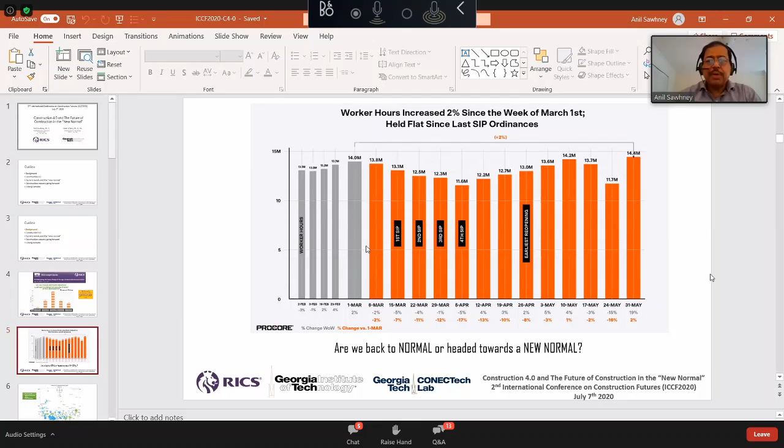Okay, I guess what I will do in the meantime is use my machine to run the presentation. The title of our presentation is Construction 4.0, and the Future of Construction in the New Normal. Thank you for inviting us to present on this topic. We're going to follow a simple structure: I'll provide some background context, an overview of Construction 4.0, which is the title of a handbook I've co-authored with Javier and Professor Mike Riley from Liverpool John Moores University, then hand it over to Javier to present his work relating to Construction 4.0, and at the end, hopefully some questions and answers. I understand this is the last presentation, so we must remain on schedule.

The first thing I want to share is some of the work RICS has been doing since we entered this COVID situation. We've been running a lot of digital webinars for our members and non-members globally. I'll pick one we recently worked on, on May 26th, called Prefabricating the Future: Design in the Age of Industrialized Construction. This webinar discussed, with the help of leading industry experts, how construction is going to shape up post-COVID.

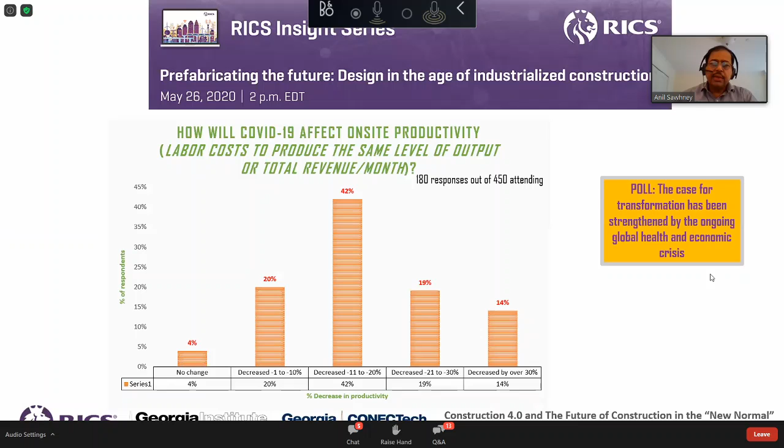Construction sites are seeing about a 10 to 20% drop in productivity due to health and safety guidelines and other safe distance measures in place. Generally, people felt during these sessions, attended mostly by industry folks, that the case for transforming towards a digital approach to construction is becoming stronger.

This is further evidence of what's happening - a very interesting application of digital technologies in construction. Most of you would have heard of a platform quite popular in North America called Procore, that most construction companies have begun using. Based on this tool, they've done big data analytics in the background, since their system is used by project delivery networks on a variety of projects throughout North America.

This graph was plotted using data stored on their cloud-based system, and you'll notice a significant drop in recorded worker hours in the month of April. The drop started really in March, with some ups and downs, and a significant decline. But by May and June, the levels of worker hours recorded are reaching back up, or even going beyond pre-COVID times.

So does that mean we are back to normal, or are we headed towards a new normal?

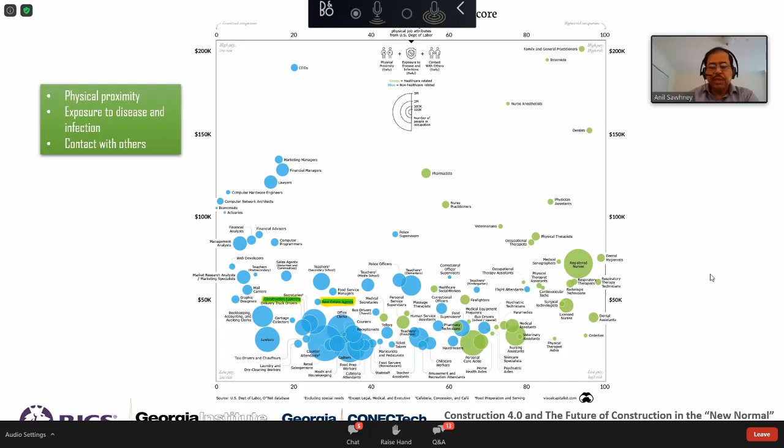If you are keeping track of what's happening in the industry, you will notice various parts of the world are using this as an opportunity, calling it a reboot, a restart, reimagine, reinvent. RICS, this month, is calling it Build Back Better, or the new normal. I don't know what the real story is, but one thing has become clear: there is going to be an acceleration towards digital transformation given what we are witnessing.

That transformation, as we see it at RICS, is towards three major themes: how we construct or fabricate, how we develop and use digital tools, and how we procure and deliver. Using that as a theme, we needed a paradigm or a glue that combined these three needed transformations, and we feel that the Construction 4.0 framework provides that.

We define Construction 4.0 as a paradigm that uses cyber-physical systems, Internet of Things, data and services to link the digital layer - consisting of BIM and CDE - and the physical layer - consisting of the asset over its whole life - to create an interconnected environment, integrating organizations, processes, and information to efficiently design, construct, and operate assets. So that's a paragraph of a definition.

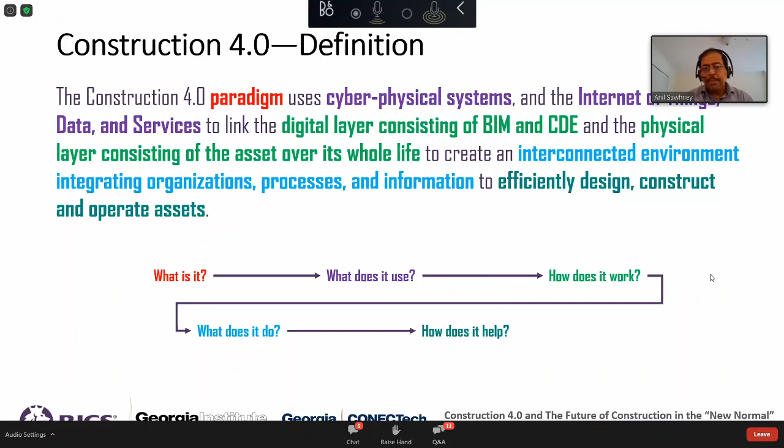But broadly, what we try to define is what Construction 4.0 is, what technologies and emerging trends it uses, how it works, what it does, and how it helps. Broadly, we think the Construction 4.0 framework rests on a model and data-centric layer, supported by product platforms or physical platforms and digital platforms, which eventually impact or benefit the people and processes we envision in the Construction 4.0 framework.

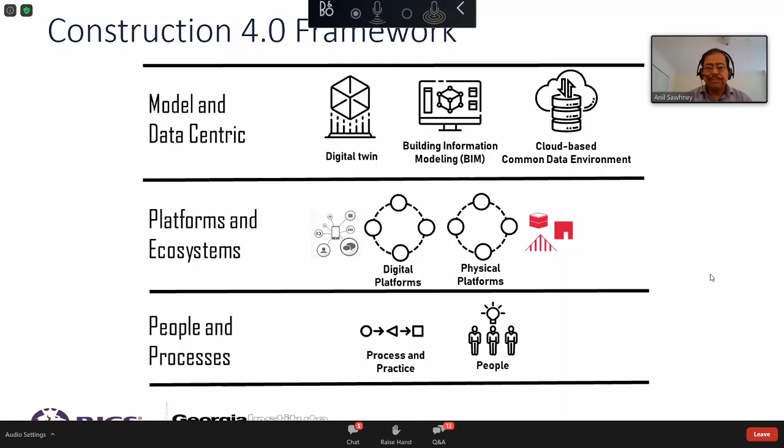One of the aspects we cover within Construction 4.0 is this idea of digital ecosystems. As you know, many of the companies that have been successful have moved away from selling a product. They create an ecosystem in which a large number of collaborators come and create innovative products where the end user or customer also participates. I think that is happening in our industry today, and that is a crucial feature of Construction 4.0.

Large players like Autodesk have Autodesk Forge. Procore has its own platform where you can take their core layer, which is exposed using SDKs and APIs, and build digital tools to solve real world problems, partnering with third party developers. You can find more information about the digital ecosystem in what we have published.

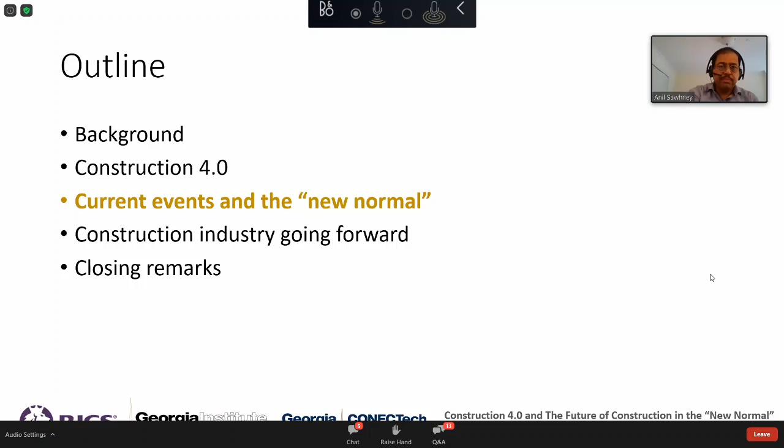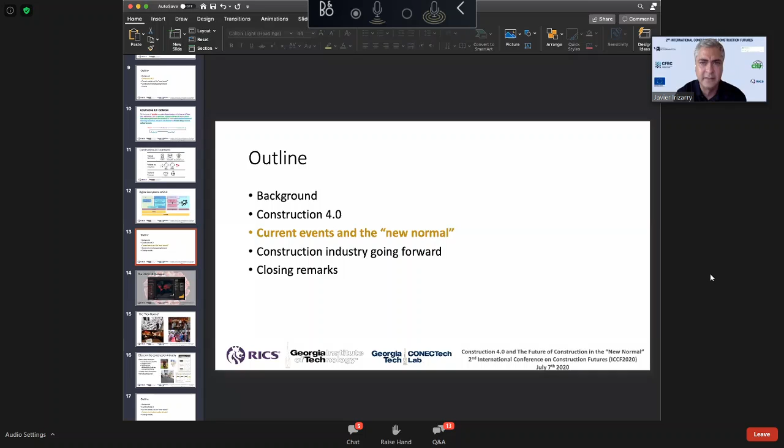Excellent, thank you Anil. Apologies earlier, my computer didn't seem to want to share my screen. I'm going to try to do that now. Should I stop my presentation? Not yet. Okay, can you see my screen? If you can stop sharing. Is my screen visible? Yes. Okay, so I will continue.

Some of the presenters earlier during the conference—first let me thank the organizers and colleagues for their wonderful presentations, very informative, and for the opportunity to come and share some of the insights that we're gleaning from this whole situation. I won't spend too much time going into the pandemic itself, a very controversial subject, as you can imagine, but it has had a significant impact worldwide.

You can imagine the situation in retail establishments. For example, here in the U.S., an attempt was made to start reopening. Some places were determined to be reopening sooner than they should have, and they're having issues now. But adaptations were made to the way that businesses operate, services are rendered—social distancing is the norm now.

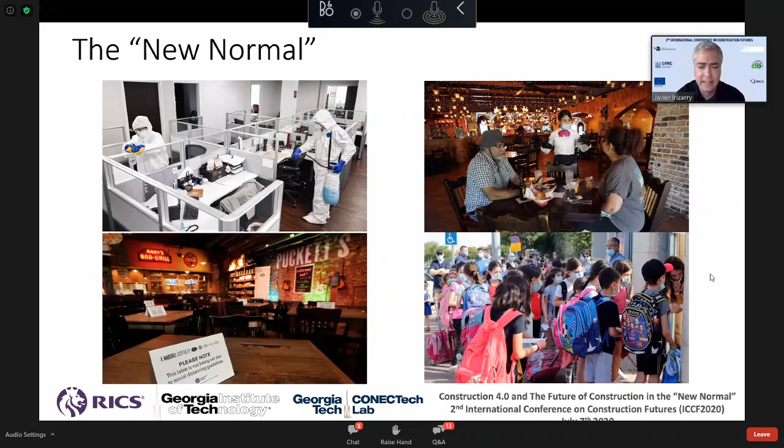But how has that affected the construction industry? Some colleagues have gone into detail on the economic impact and how the industry is being affected. In broad terms, what we see is the need for social distancing—workers have to work with more space between them, enhanced personal protective equipment such as face coverings and face shields, and arrangements of work in staggered shifts. Now the trades have issues that would affect schedule, as they have to work on different schedules almost. And the need for top-to-bottom disinfection of job sites and things they use every day, such as tools and machinery, have to go through enhanced disinfection protocols.

Supply chain disruptions—covered in detail a little earlier—and the use of remote office work. Now a lot of the functions that can be done in job site offices are now being done remotely as well. I show some examples of a local construction company here in the city of Atlanta, Batson-Cook Construction, and some of the measures they've taken.

This is taken from their protocols on how to implement and educate their workforce on what social distancing is. For example, some of these graphics show the relationship between common day objects, or objects that workers would find on a construction site or in everyday life, and what that means in terms of separating themselves from others. Also, the protocols on temperature measurements—that is being implemented at job sites, and now there are temperature measurement stations that workers have to go through every time they enter the job site.

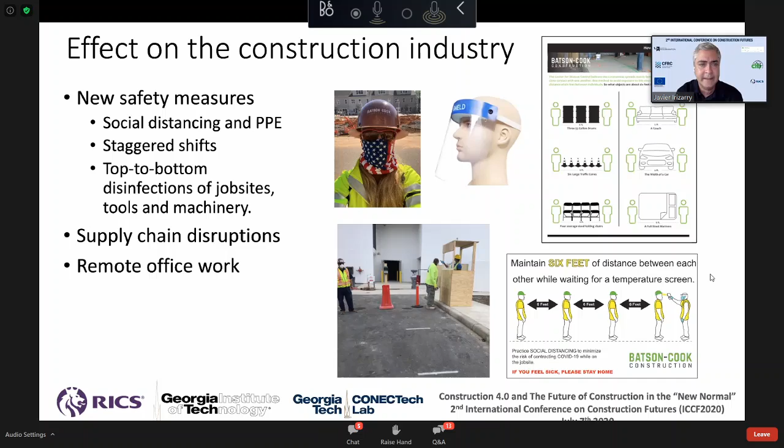So what are going to be the effects of these? These are things we're asking ourselves, and there will be a lot of research that will try to assess what the quantifiable impact of this situation will be. So what do we think the industry is going to be experiencing going forward? I have a couple of things I'd like to talk about.

What we're seeing, and thinking is in the process of happening, is this integration of technologies and the Construction 4.0 framework that will become even more relevant going forward. Like Anil mentioned earlier, we worked on this Construction 4.0 book. We didn't know this was going to happen, and we thought the time frame for implementation was longer than we think. A lot of the technologies are already here.

But we did not imagine we would be thrust into immediate application of some of these tools as we are seeing now. You see examples of workers who have to wear enhanced protection equipment, physical separation, but also the implementation of technologies that have been researched and tried to apply for years, and sometimes decades, like virtual reality, augmented reality, robotics, and so on.

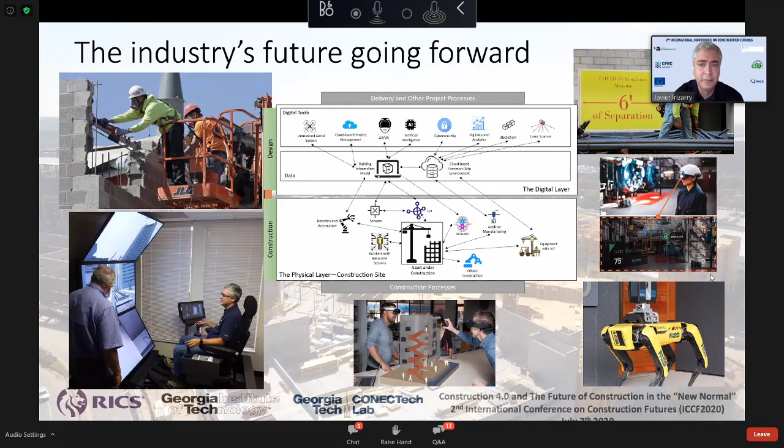So some of the things I'll quickly go over: the need for new or adaptive skills. Professor Soyman mentioned that education is going to have to change. Our students in the future will have to be more nimble and adaptable to these new technologies coming into the workforce. We're seeing that and implementing it right now, trying to address it through our own educational offerings. Collaborative environment.

We had the experience in higher education here, and across the world I'm sure, of having to switch at the drop of a dime to virtual learning. That same experience in virtual learning will be even more important. We continue to have a need for remote work, and the redesign of tasks that we perform now in the industry.

I have one quick research example that I'll share, but there are many more that show how Construction 4.0 technologies will help redesign some of those tasks. I'll talk about what's happening in construction education that will hopefully help us address the current situation, and looking toward the future, implementing Construction 4.0 for the improvement of the construction industry.

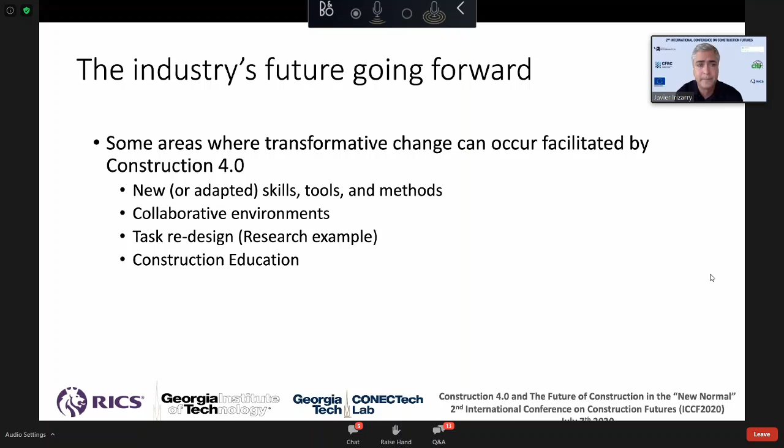So, new or adaptive skills people will have to start getting used to and learning about. Some examples include, from my own experience in the last almost 10 years researching the use of unmanned aerial systems for applications, the figure on the left shows a concept we imagined for how drones would be used in construction sites. This is almost 10 years ago. Now this is a reality.

The part that's still not fully implemented is something like two-way interaction or communication between workers and drones on job sites. With the need for social distancing, we think this will be a reality sooner than we expected.

We've also been working with the development of unmanned aerial platforms that can help move things around a job site. Logistics is something COVID-19 has affected because of the need for social distancing and issues with logistic and supply chains. So we've developed a few units able to carry small and large loads, about 100 pounds. In the future, we see how these vehicles will help site workers move things around without having to interact with each other that much, at least for the foreseeable future.

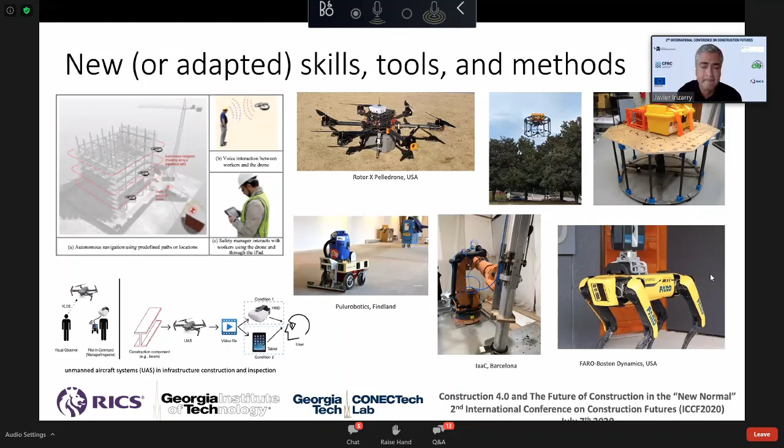There are other technologies that are part of the Construction 4.0 framework, such as prefabrication. A few years ago, I had the opportunity to visit China and tour some of their concrete prefabrication facilities, where they developed very efficient ways to prefabricate concrete panels for high-rise construction applications.

We don't have to go too far to see successful examples of this. Last week, the Prime Minister of the United Kingdom, something mentioned in an earlier presentation, toured a facility from Totally Modular, a company creating prefabricated dwelling units in the UK. This is something that will become more used going forward.

In terms of design, there are companies that have developed design software. Vertex Systems is a worldwide company with design software that companies can use to design prefabricated modules and construct factory environments. This will definitely be helpful and useful given the current situation and the new normal.

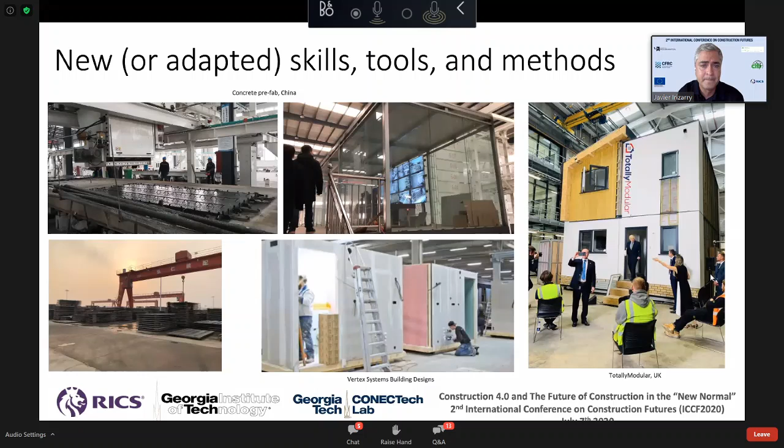So about collaborative environments, Professor Silberman was talking about some of the virtual reality setups that they have used, and we think this will continue to grow.

But in addition to collaborative environments that use virtual reality, something we experienced moving to online education, and feedback we received from students, were the issues with the lack of personal interaction. So these virtual environments are evolving and will evolve to try to provide some sense of telepresence.

To that point, there are companies, Kompai Robotics is one example, that have developed telepresence robots used in healthcare environments. We think this will be something we'll start seeing in construction sites, so you can still have a physical presence on the job site with physical or social distancing, but not be so socially apart.

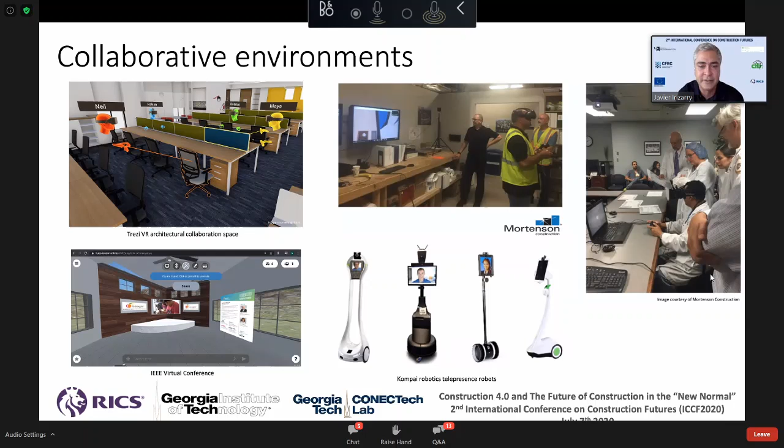In terms of redesigning tasks, we are starting some work with the Georgia Department of Transportation. We didn't expect that this type of research would become so relevant to the current situation when we started talking about redesigning tasks.

The purpose was to allow inspections of mowing work, a very mundane task in construction or infrastructure maintenance, where supervisors go out to the field to inspect contractor work. We're looking at providing a remote version of that task, where the inspector can deploy drones to take images, and using artificial intelligence, those images are processed to detect changes in surfaces, assessing whether grass was cut or not, and to what extent, to assess the quality of the job.

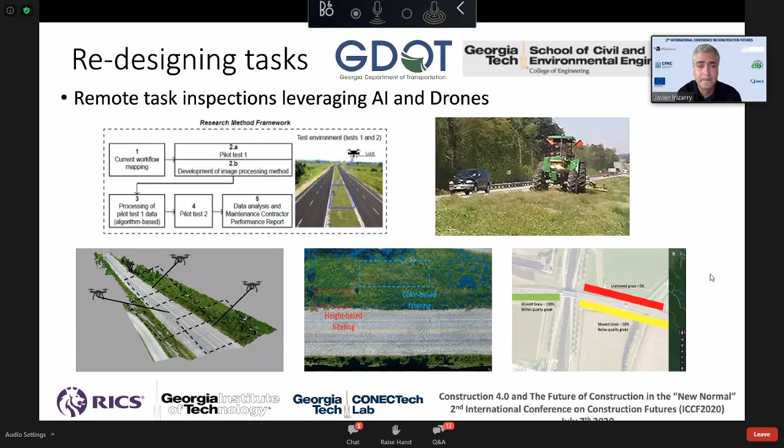In terms of construction education, education overall has been affected by the current situation, requiring universities to take unprecedented measures. Here in the US, just yesterday, three large universities, Harvard, Princeton, and another I forgot, announced their plans, which include fully online learning for the fall semester with limited student access to the universities. Those are two of the three universities that shared their plans yesterday.

From our perspective, Georgia Tech plans to have mostly hybrid learning during the fall, but we're still trying to figure out how that hybrid learning would look. Colleagues at Purdue, Professor Hastak, will probably know more about these plans than I would.

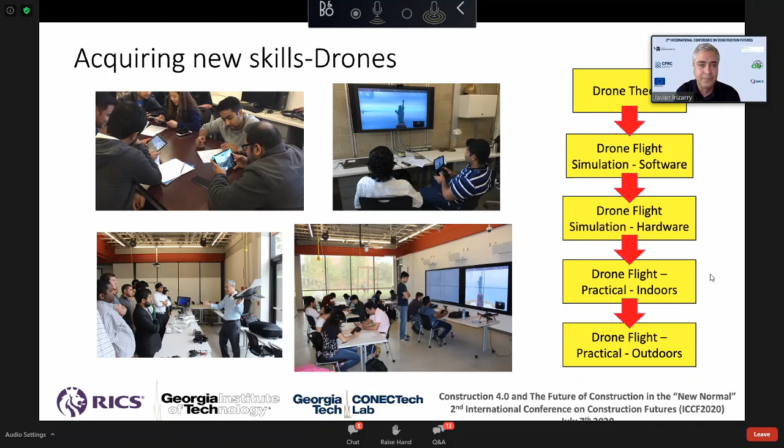This is another example of the environment we use to teach students to use this technology. That's an indoor flight cage, because when dealing with drones, safety is a concern.

And the image you see here of the student holding the drone, that's the answer to Dr. Bird's question or comment on the Georgia Tech football team not being very good. These team members—I think because we have them work so hard and learn new skills with drones and things like this, they probably are not as good as Auburn, I guess.

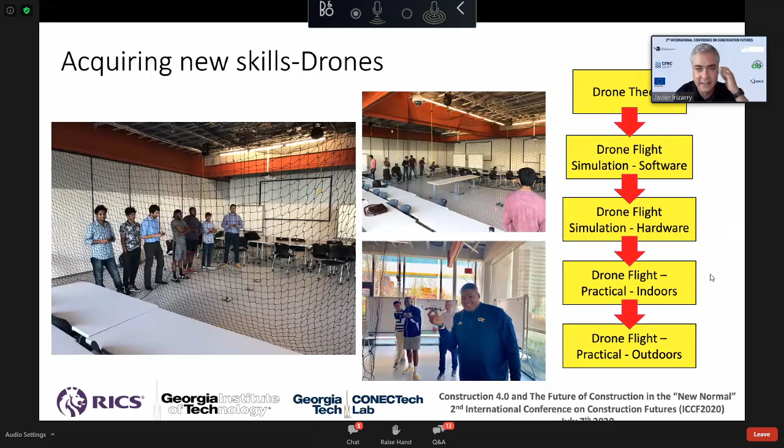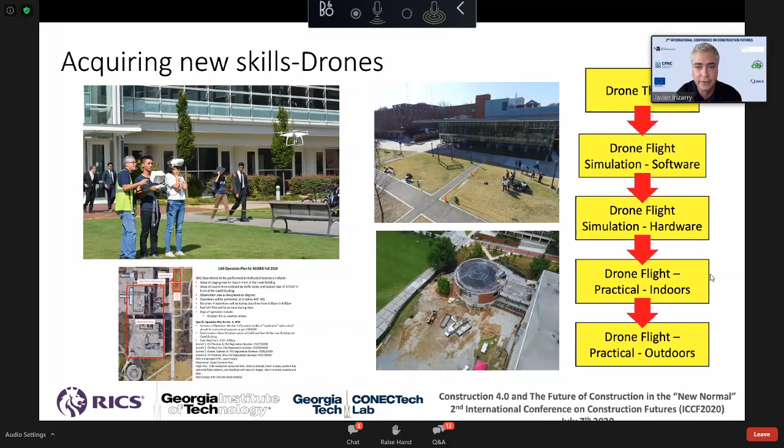So after learning the ins and outs of using drone technology in a structured educational environment, one benefit students get is that they can sit for the FAA Part 107 exam, which is the drone license that I have, and which allows me to legally teach students to use drones in a classroom. They've been able to get that license, so they go to employers and can immediately apply that skill.

Some other examples from colleagues across the U.S.: University of Florida, in the M.E. Rinker School of Construction, have been using safety measures, social distancing, personal protective equipment, and disinfection protocols to be able to continue delivering hands-on courses like we see in the image, surveying.

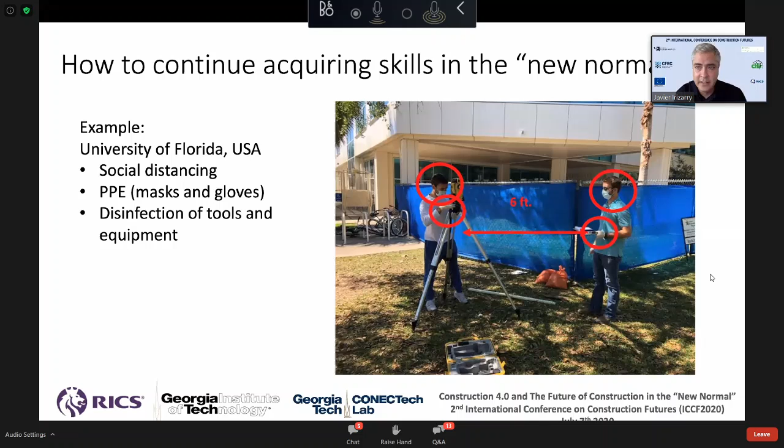I'd like to mention that one way we're trying to address the need for new skills in a world where Construction 4.0 technologies are going to become even more used is the restarting of our undergraduate program. We have reimagined our undergraduate degree, and it's mainly focused on the implementation of technologies that are Construction 4.0 friendly, that will be needed by the future workforce. So that's how we're trying to contribute to the industry by providing graduates and the future workforce with the skills that are going to be needed.

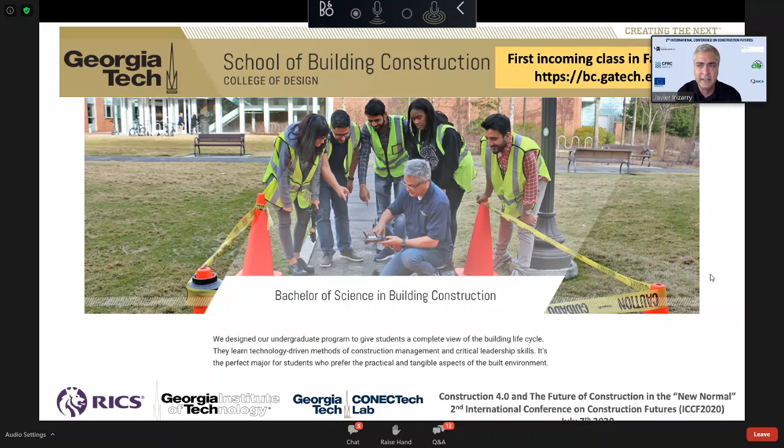Almost at the end of the presentation, I'd like to recommend some reading material: the Construction 4.0 book that Dr. Sawhney and Riley from John Moores Liverpool University and RICS co-authored with myself. This is useful for industry and academia to get a primer and learn about these technologies in one place, and hopefully share with students to train the next generation of construction professionals who will be Construction 4.0 ready, and ready for Construction 5, 6, and the future.

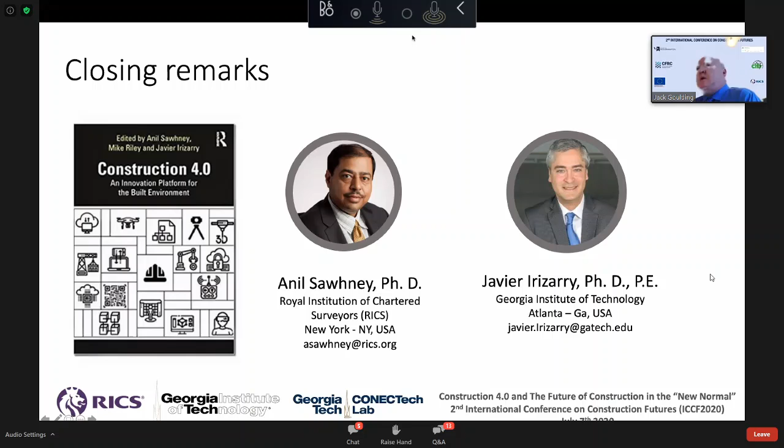Notwithstanding that, we have three questions, I'll take them in order and ask two. The first is about prefabrication: the prefabrication industry faces a lot of issues due to high variability and low volume. Post-COVID, can we expect the prefab industry to pick up and meet the new norms you mentioned?

Maybe I'll address that one, if you don't mind, Javi. It's a very good question. I can definitely say the current situation has once again accelerated interest towards adoption of prefab, but the challenges still remain. One challenge is that when we talk prefab, most folks think it's volumetric, pods, and their implementation is limited in projects. But really, when we talk about prefab, we should consider on-site, near-site, off-site production of components that are not necessarily volumetric.

A lot of that is already happening in the industry, especially in mechanical, electrical, and firefighting trades, especially in the US. When we ran this webinar with Autodesk, CannonDesign, and a construction company, Bold, we had a very interesting discussion about economies of scale and transportation issues. But I think today the technology is there to deliver prefab. It's a matter of our procurement regimes, and cultural and mindset issues that need to be overcome. There are several examples of testing pods for COVID and deploying medical facilities using prefab technology, but I think it's only a temporary phase the industry is going through. In the long run, this has definitely helped promote the idea of prefab.